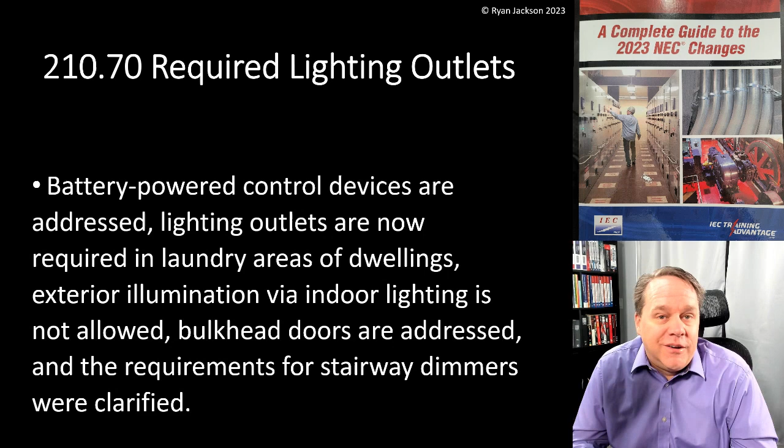Okay, so the last thing we're going to talk about in Article 210, which covers branch circuits, is 210.70 required lighting outlets. Battery-powered control devices are now addressed. Lighting outlets are now required in laundry areas of dwellings. Exterior illumination via indoor lighting is not allowed. Funny little thing there. Bulkhead doors are now addressed, and the requirements for stairway dimmers were clarified as well. All right, so lots to talk about here.

210.70, lighting outlets. Lighting outlets must be provided in accordance with 210.70 A through C. All right, so is that a lighting outlet? Yes, it is. It's a lamp holder, not a luminaire. But actually, if I were to take that lamp holder off and put a blank plate on it, that's the lighting outlet by definition. So you don't necessarily need illumination in the NEC, you need lighting outlets. So putting a blank cover over that would be compliant as well. Although honestly, I think a keyless lamp holder like that is actually less expensive than a blank, so might as well put on a keyless.

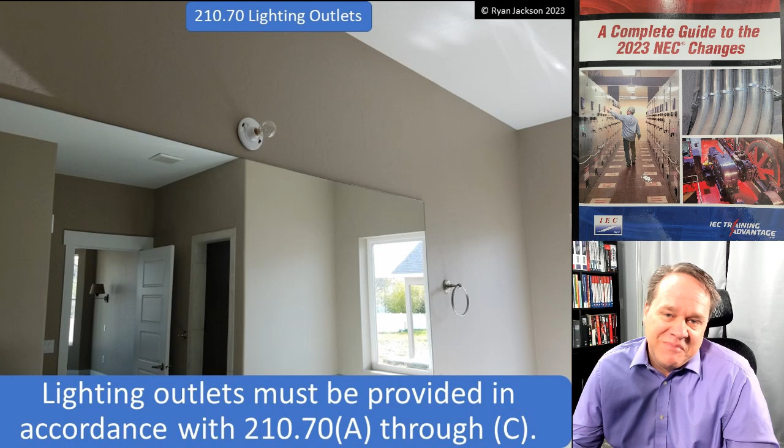So we address switches and wall-mounted control devices, and in this section we mainly say, listen, you need to have a wall-mounted control device. Well, a switch, an old school 120 volt switch, that is a wall-mounted control device, right? It's mounted in a wall. It's a control device, so don't get carried away thinking, oh man, I can't use regular switches. Of course you can use regular switches. We're just acknowledging that maybe the days of 120 volt switching are going away. I think we all kind of realize that.

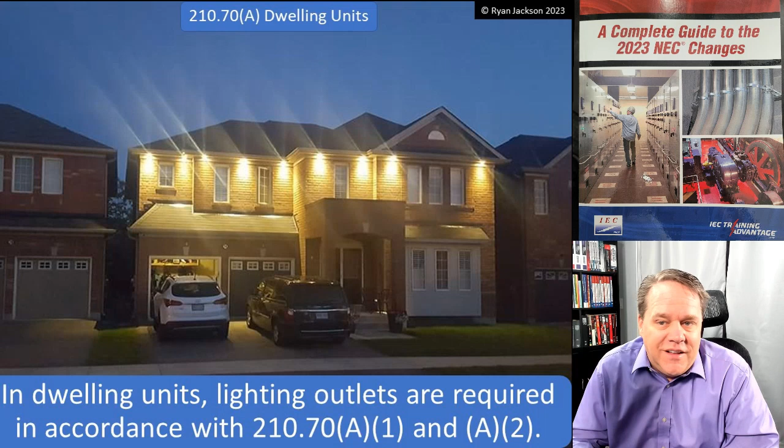In dwelling units, lighting outlets are required in accordance with A1 and A2. A1 talks about bathrooms, habitable rooms, kitchens, and laundry areas. Now the title was obviously revised because we talk about a lot more than just habitable rooms in this section, but the title only said habitable rooms, so now it's revised to actually match the code language. And as you can see, we also added laundry areas. Laundry areas, just kind of one of those things that didn't require a lighting outlet.

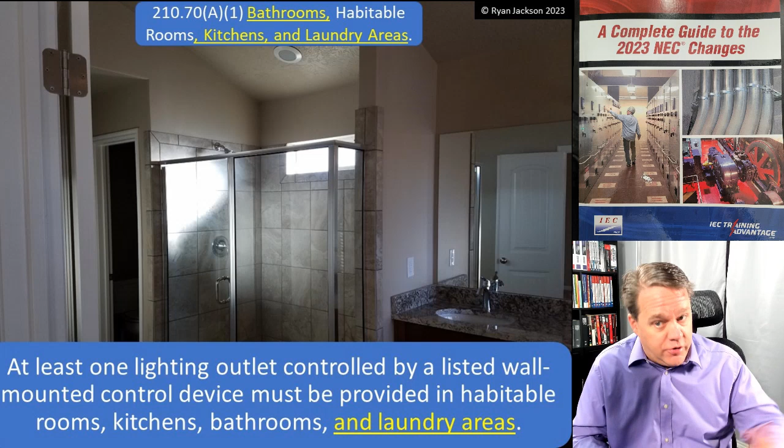Probably should have, but it didn't. So at least one lighting outlet controlled by a listed wall-mounted control device must be provided in habitable rooms, kitchens, bathrooms, and now laundry areas. Fine. The control device must be located near an entrance to the room.

All right, so we never used to talk about switch location. In my opinion, that was always a design issue, not a safety issue. So in the 2020 code, they changed it and said it needs to be located near an entrance to the room. Okay. Doesn't have to be in the room. It could be outside of the room.

This photograph here, back in like the 50s, at least in my area, it was normal to put the bathroom light switch outside of the bathroom. I have no idea, to this day, why that was so popular,

but I can tell you, man, growing up, when me and my brothers would go to my grandpa and grandma's house, if one of us had to go to the bathroom and was in there for more than about 8 seconds, me or my other brother were right behind him turning the light off. So anyway, this picture always just kind of takes me back. This isn't my grandparents' house, but very similar scenario.

All right, exception number 1. In other than kitchens, bathrooms, and laundry areas, so basically habitable rooms, bedrooms, living rooms, receptacles controlled by a listed wall-mounted device are allowed instead of lighting outlets. So you don't need a lighting outlet in the ceiling or wall sconces. You can just have switched receptacles, but you can't have those in kitchens, bathrooms, and laundry areas. No problem.

Exception number 2. Still talking about dwellings. Occupancy sensors installed at a customary wall switch location can also control the lighting outlet as long as they have a manual override setting.

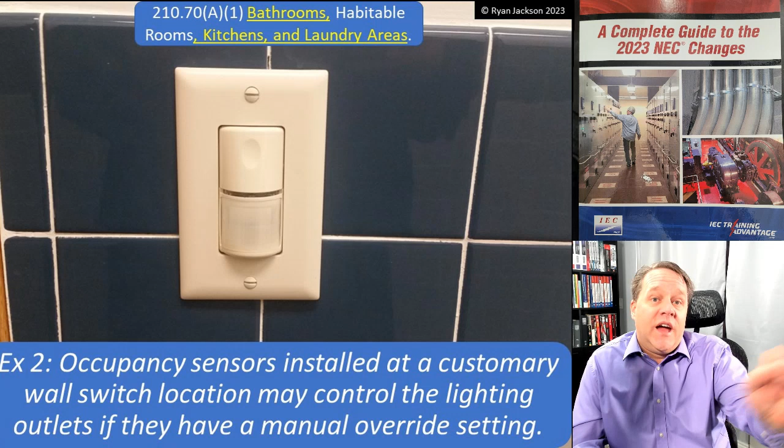It may seem weird that we're talking about occupancy sensors installed at a customary wall switch location. Well, for those of you that do commercial, we install occupancy sensors all the time up in the ceiling, right? And what we're saying here in residential is, listen, you want to put an occupancy sensor in, be my guest. You're not putting it in the ceiling. It's got to be somewhere where I can actually override the setting. It makes sense when you think about it.

Additional locations. A lighting outlet controlled by a listed wall-mounted control device is required for hallways, stairways, garages, and detached garages or accessory buildings that have electricity. Kind of one of those things that slips through the cracks, right? You've got a detached building in your backyard. If it's a garage and you run electricity there, you need a lighting outlet. If it's a tool shed and you run electricity out there, well, I guess you didn't. So now you do. Yeah, come on.

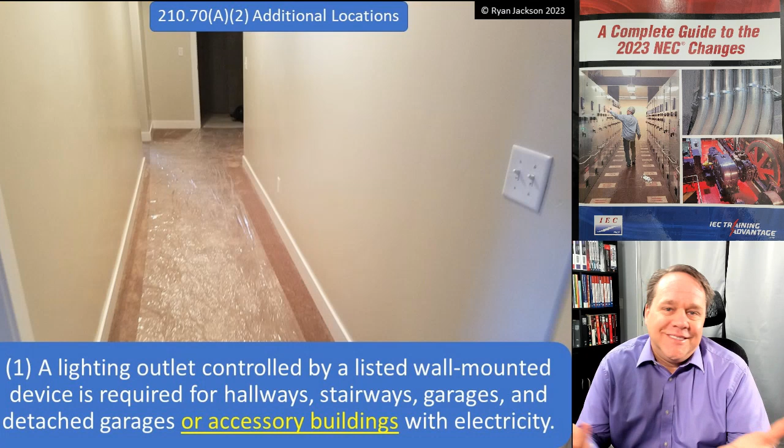Item 2. This one's kind of a funny one. For dwellings and garages, an exterior lighting outlet controlled by a listed wall-mounted control device is required to illuminate the exterior of personnel doors. This is one that was submitted by my friend Russ. He's good at finding little quirky holes in the code. He and I are always finding weird little things.

Exception to item 2, and really this is kind of a mistake. This needs to be an exception to all of this, not just item 2. For an outdoor or exterior bulkhead door at grade level with stairs to a basement. So think Wizard of Oz for a minute.

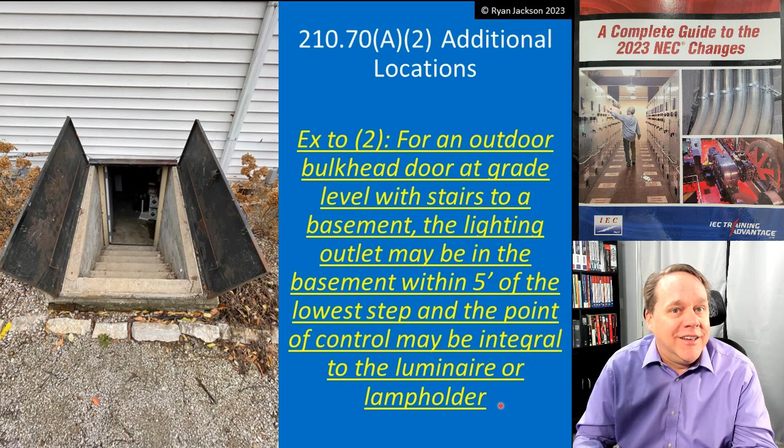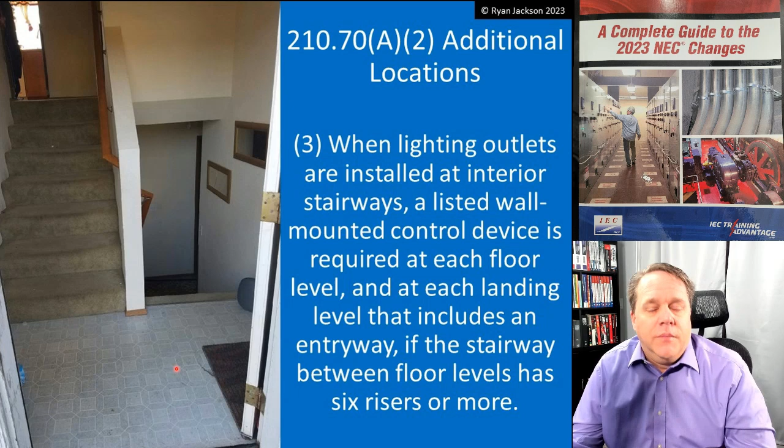The last thing for stairways: when lighting outlets are installed at interior stairways, a listed wall-mounted control device is required at each floor level. So switch up there, switch down there, and at each landing level if the landing includes an entryway, if the stairs between floor levels has 6 risers or more. So in this photograph, we need at least 3 wall-mounted control devices. One at the top, one at the bottom, one at the intermediate landing, only because there is a door at the intermediate landing. That's been in the code for a while.

Item 4 was added, I think, in the 2017. They made a small little change in the 2020, and it ended up being a major screw-up. And again, look, code's written by humans. We have a right to make mistakes. So, in the 2017 code, they made a rule that said, listen, if you want to put a dimmer to control your stairway lights, you need to have a dimmer at the top and bottom. In the 2020 code, they changed it from saying a dimmer switch to saying a wall-mounted control device or whatever. They meant to make just an editorial change.

And what they accidentally did in the 2020 is they said, listen, you have to have a dimmer for your stair lights. Full stop. And it's like, okay, wait a minute. That was never the idea. If you don't want to put a dimmer, don't put a dimmer, right? We're not going to make you put one in. But the 2020 code accidentally said thou shalt have a dimmer for the stairway lights.

Okay, that's not required. What it says, and what it always meant to say, is stairway lighting must not be controlled by a dimmer unless a listed wall-mounted control device at each level can establish the maximum brightness of the lighting. So if you choose to put a dimmer at the top or at the bottom, then you have to put a dimmer at the top and the bottom. And both locations have to be able to fully control the illumination range.